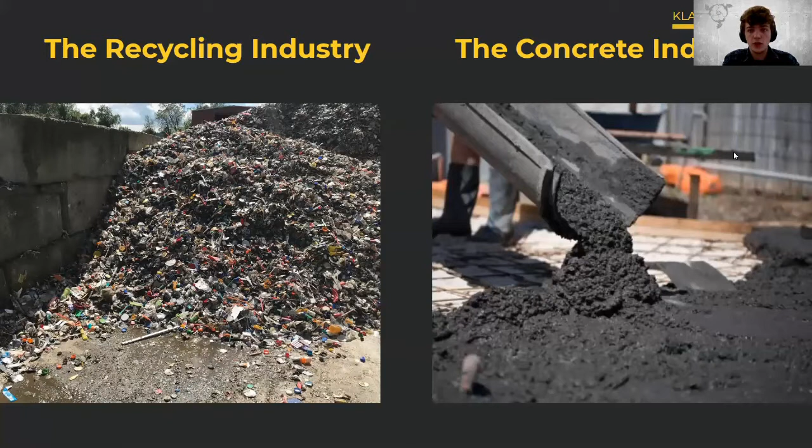At KLAW, we turn glass bottles into concrete. In order to understand how we do this, we first need to understand two very different industries and their systemic problems. Let's start with the recycling industry.

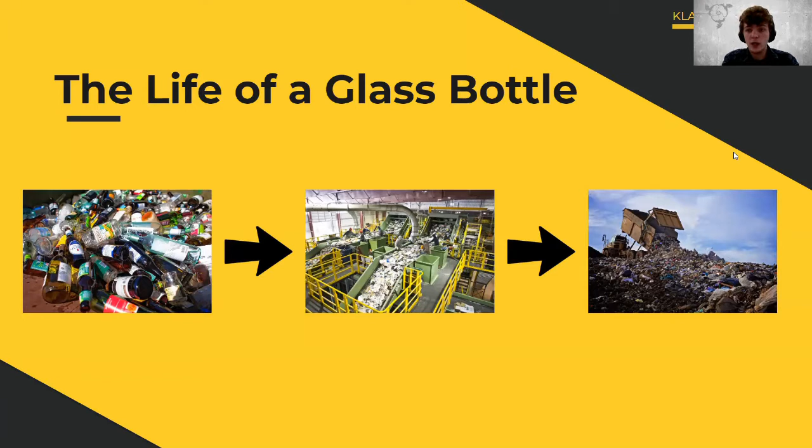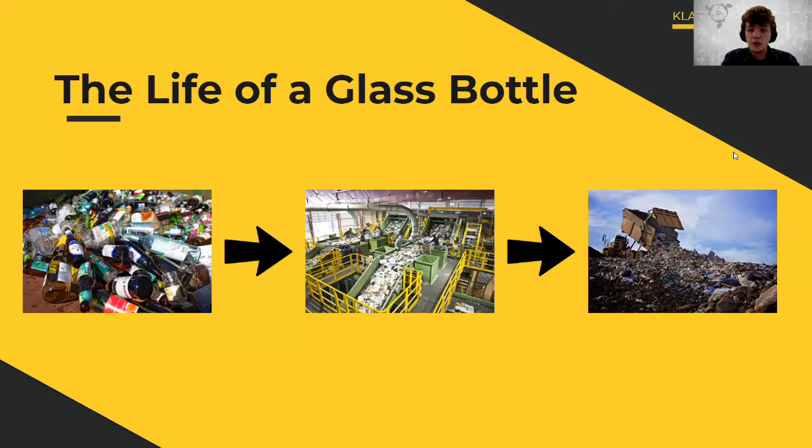When you place a glass bottle in the recycling bin, either in the southern tier or anywhere else in the United States, the glass often isn't recycled. Instead, the glass is broken up and mixed with smaller pieces of other recyclable materials, making the glass unusable to make new glass bottles or anything else. Because of this, recycling facilities are forced to send the glass to the landfill at a loss.

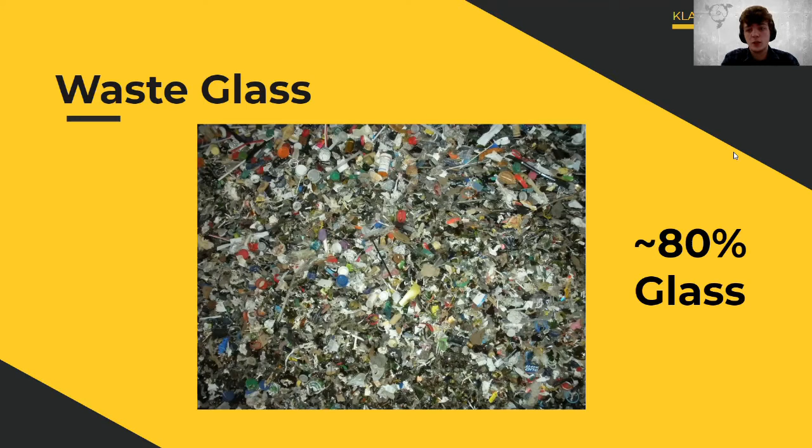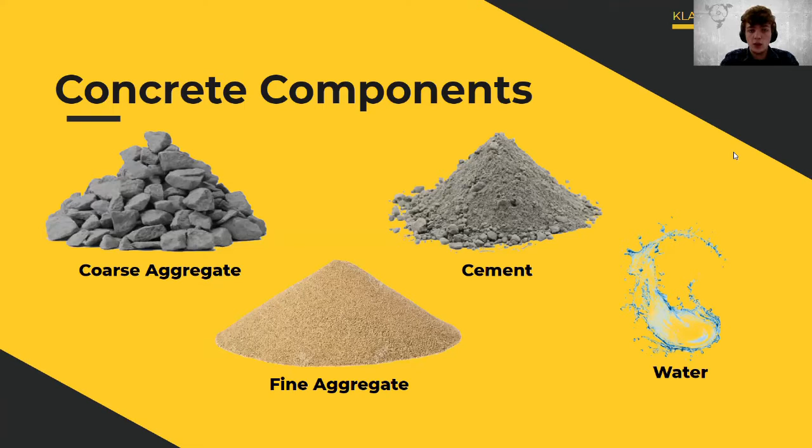Now, totally switching gears, I want to talk about concrete. To make concrete, you need coarse aggregate, think gravel, fine aggregate, think sand, and then cement and water, which form the glue that holds the aggregates together. This makes the concrete we all know and love, but there's much more to it than that.

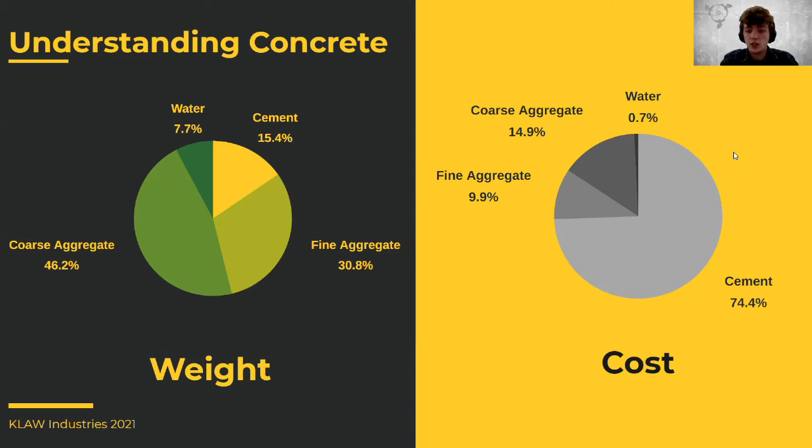Cement is about 15% of concrete by weight, but it's 75% of concrete by cost, making it by far the highest material cost for concrete manufacturers. In order to combat these costs, concrete manufacturers have been using cement replacements for years in their concrete mixtures. The main ones are fly ash from coal power plants and slag from steel foundries.

However, both these materials are going away because the industries they rely on are disappearing. Coal power plants are being exchanged for more sustainable energy generation sources, and steel manufacturing has been going overseas for years because of lower costs.

This means concrete manufacturers no longer have cement replacements for their concrete and are forced to go back to 100% cement mixes. This means that not only is their concrete mixture much more expensive, their concrete also has a much higher carbon footprint, because for every ton of cement that's produced, a ton of CO2 is released into the atmosphere.

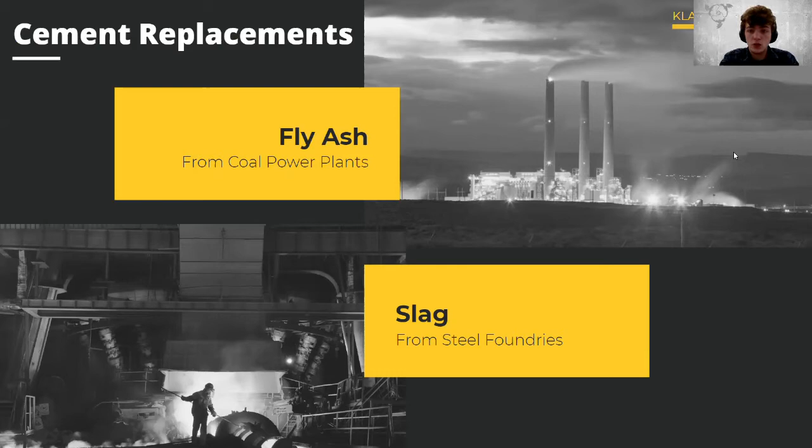So how do we solve these major systemic problems? At KLAW Industries, we are paid by recycling facilities to take their waste glass. We put it through a patent pending process and we create Pantheon, a partial replacement for cement like fly ash or slag.

For recycling facilities, we're able to offer them a lower cost of disposal, and we're able to guarantee to them that their glass is actually recycled, which is important to them both altruistically and for grant funding.

For concrete manufacturers using Pantheon, not only are we able to offer them a lower cost, since Pantheon is lower cost to produce than fly ash, slag, or cement, we're also able to offer them a more environmentally sustainable concrete. But most importantly to them, their concrete is stronger, more chemically resistant when they use Pantheon, meaning they're able to offer their customers an all-around better product at a lower cost.

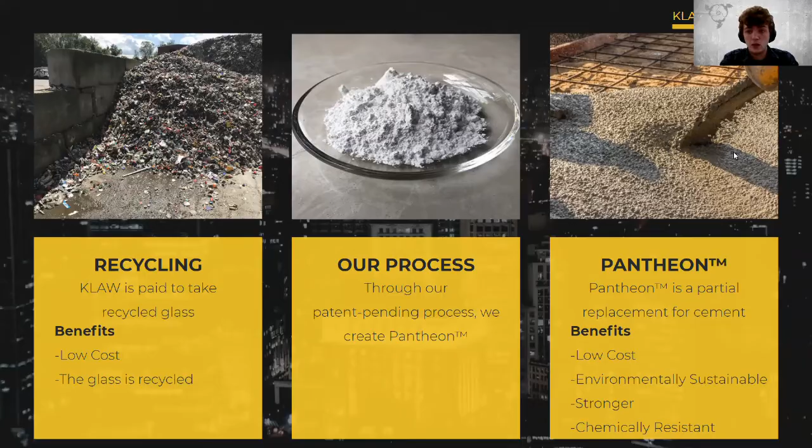To prove this in the field, we've done 7 different pilot tests at different concrete companies. One of the main ones we've done is Barney & Dickinson in Vestal, New York. In this test, we compared Pantheon to slag in a head-to-head comparison to show that Pantheon, without changing any other variables, outperforms slag.

As you can see at the 28-day mark, which is when concrete strength is measured, Pantheon beats slag by an 11% margin, meaning that it is indisputably a better product in concrete mixes without changing anything. This mix design was originally meant to be for slag.

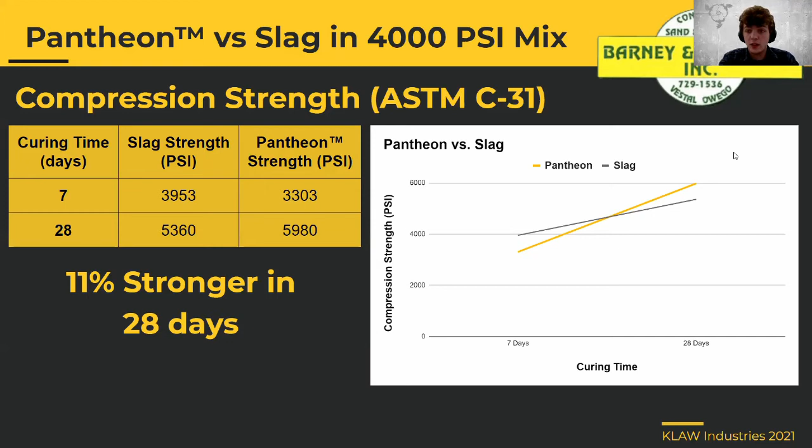So what is the competition for this product? Well, there's cement, fly ash, and slag, which we already talked about, but there's also other glass cement replacements out there that are used to some extent. The issue is these materials are made from clean glass that can be used to make new glass bottles, meaning they're paying for their raw material. This makes their material too expensive for concrete manufacturers to buy for everyday mixes, and they only use it in specialty LEED projects, if at all.

With Pantheon, we're able to offer the same sustainability and LEED benefits that other glass pozzolans do, but we also are able to offer a lower cost since our technology allows us to utilize the waste glass rather than clean glass, meaning we're paid for our raw material.

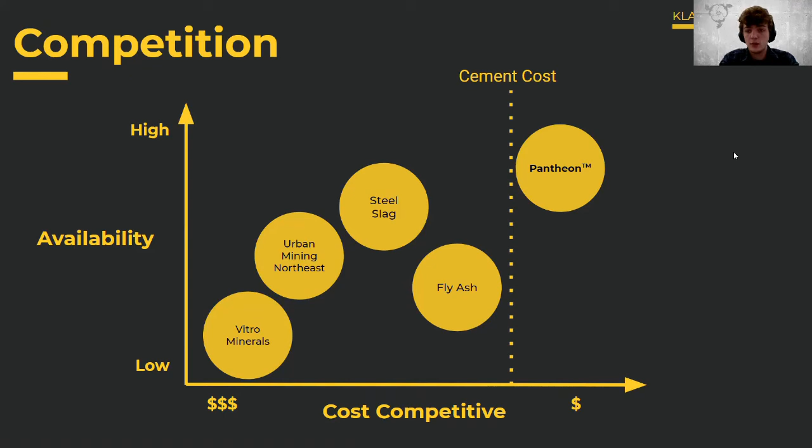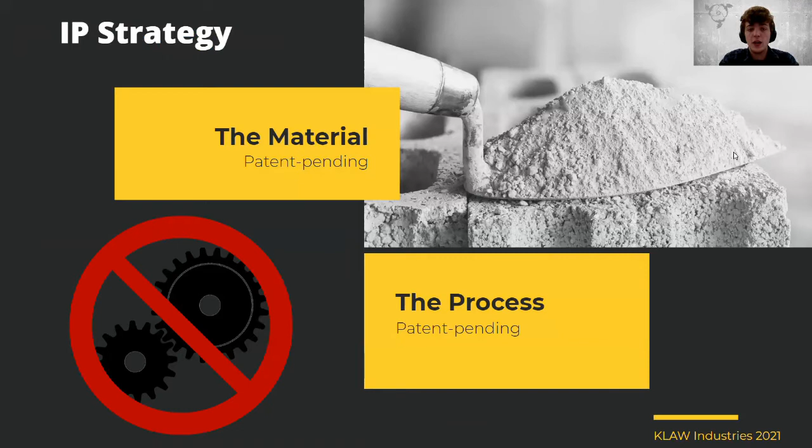We're planning to protect this material and our process with a patent that's already been filed, and we received real legal counsel. We didn't write this patent ourselves, so that we know that this patent will be bulletproof once it goes through the patent office.

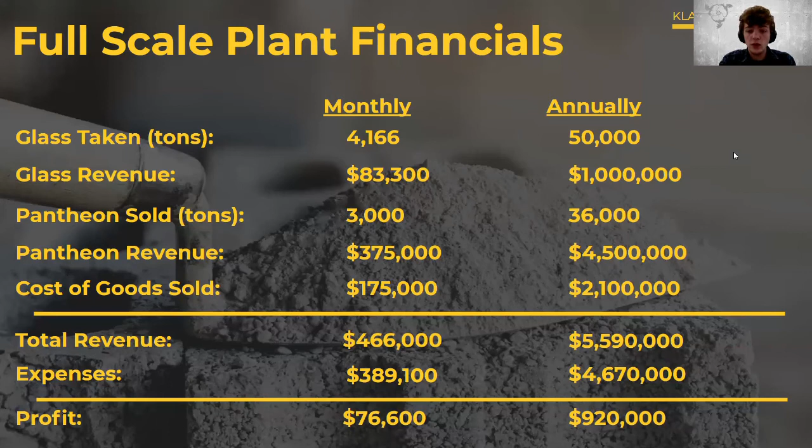At full scale, we plan to target the northeastern United States as the broad concrete industry we aim to grow into. This full-scale market can be served by one large-scale plant producing over 50,000 tons of glass a year. This will result in over $5.5 million in revenue and over $900,000 in profit.

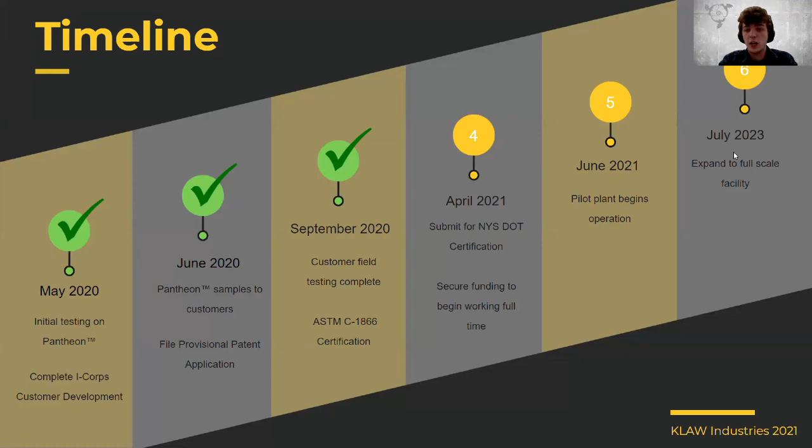Here's our timeline of what we've done so far. Our biggest next steps are applying for New York State DOT certification and securing funding for our pilot plant we open this summer. This pilot plant will eventually be grown into that full-scale plant we talked about earlier.

While I'm the one presenting, I'm not the only member of the KLAW team. I'm the CEO, but there's also Tanner Wallace, the CTO, and Jacob Kumpan, the COO. We are the founders of this company and the technology and have done in-depth customer research with all our potential customers.